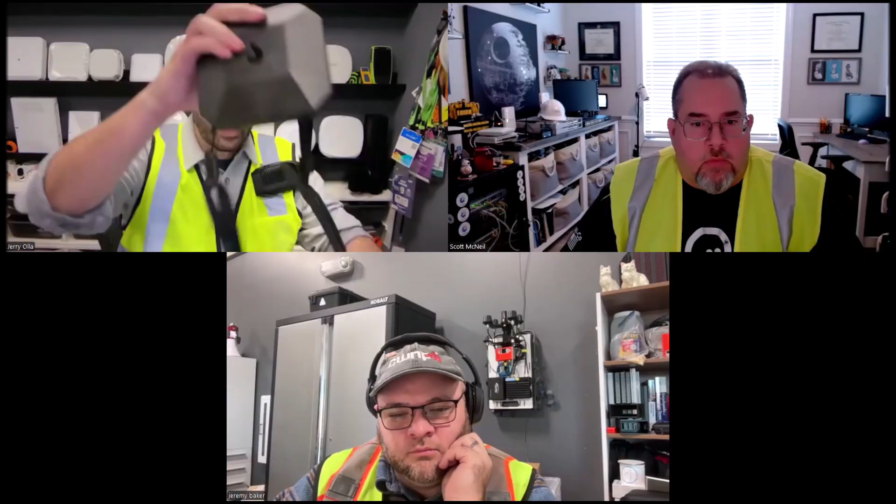So the Hamina Clip is similar to our current hardware, which is the Oscium Nomad. Both are very purpose-built site survey devices. The Oscium Nomad, if you're not familiar, is a 4 radio Wi-Fi measurement device, tri-band, all that good stuff. But this uses the traditional strap mechanism to carry. You've got a USB cable that goes from this into your device. So what we aim to do is create something that's a little simpler, potentially more budget friendly, and modernize it by leveraging modern technology like BLE to enable that communication.

So that's really where the clip was born out of. We've got this great device already, the Nomad, that's purpose built, but we wanted to make something a little more ruggedized, a little easier to use, and a little lower on the budget side to get into, lowering those barriers all over. Easier to operate, able to put this into anybody's hands, no cables, no straps. So it's all about simplifying and making this technology more approachable and accessible to a larger audience.

So this is to be used in conjunction with the Hamina survey software? Yes, with Hamina Onsite. And it just sends all of its data via that Bluetooth connection to your iPhone or iPad in order to populate your survey on your screen. Correct? Yeah.

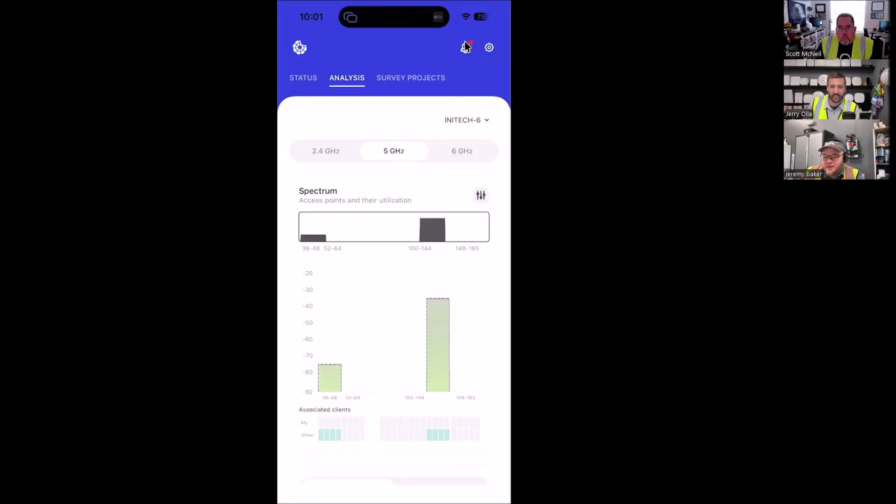So while typically you're going to be wearing this and having it very close to you, what kind of range are you looking at for connecting this device to an iPhone or iPad? Yeah, that's a good question. Honestly, we haven't done a ton of testing of how far away you can get it, because the focus has been around the operator, the device, and the iPhone or iPad being part of the same person. But talking with folks like Jeremy, the gears have already been turning for him to do some other things with it. So we're starting to look at what other things we can do with this.

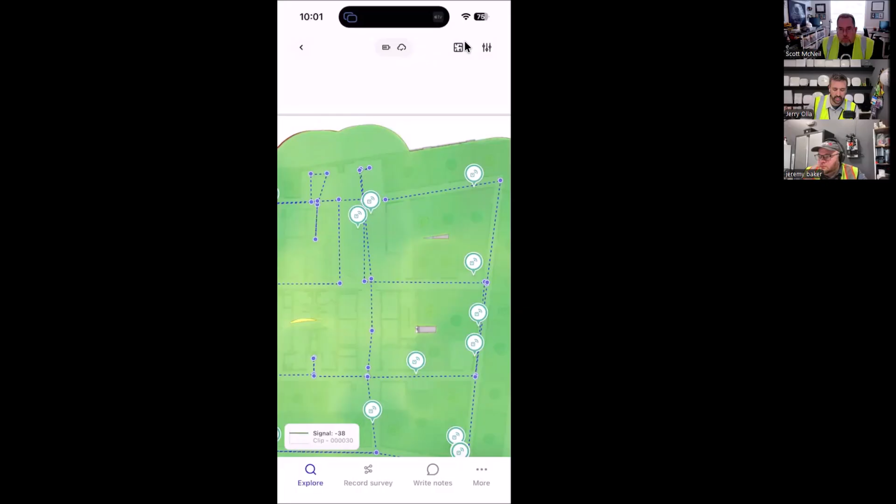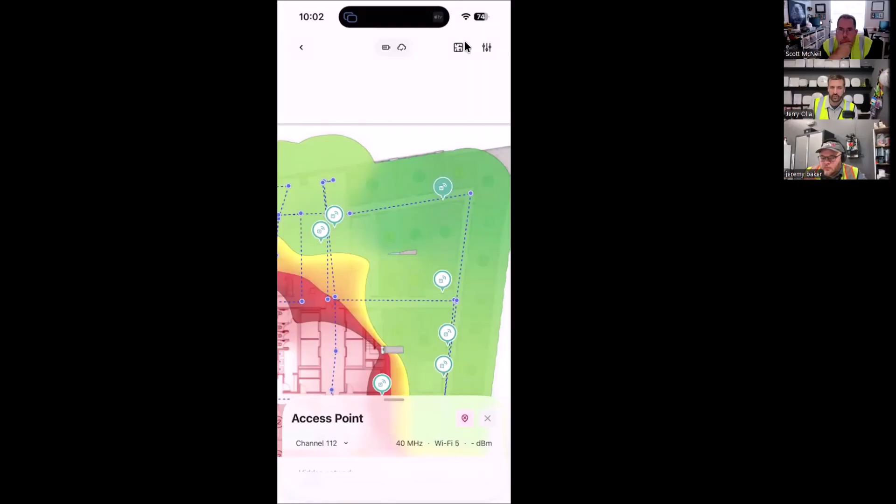But here's a survey that I completed recently. I had the clip to my belt and just walked the site, and you can see we're getting really nice detailed results of the signal. We could certainly get some distance, but the purpose of site surveys is generally that you're going to have the device physically on you and then walk with the device, if that makes sense.

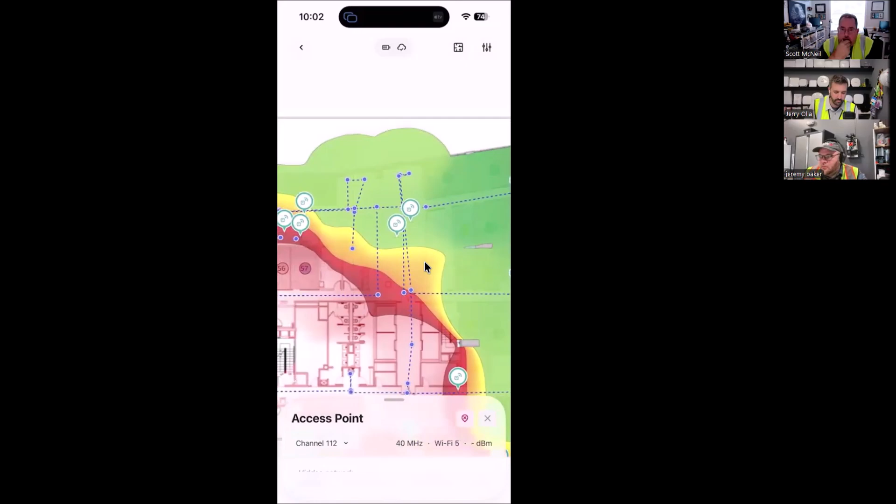Now, is this tap and turn, or is it more like an autopilot? Good question. That's actually something else that we announced. What I did here was all what we call continuous survey, and that requires me to physically tap the screen. For example, if I go back to a project, let's say I'm going to survey this room. I'm going to say record survey, then continuous survey. I'm also going to remove our filter here so we can see some live data coming in as we survey.

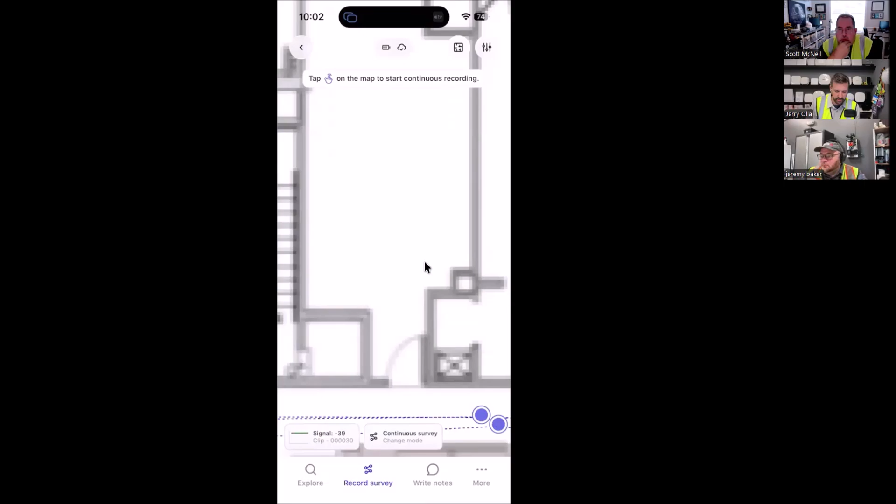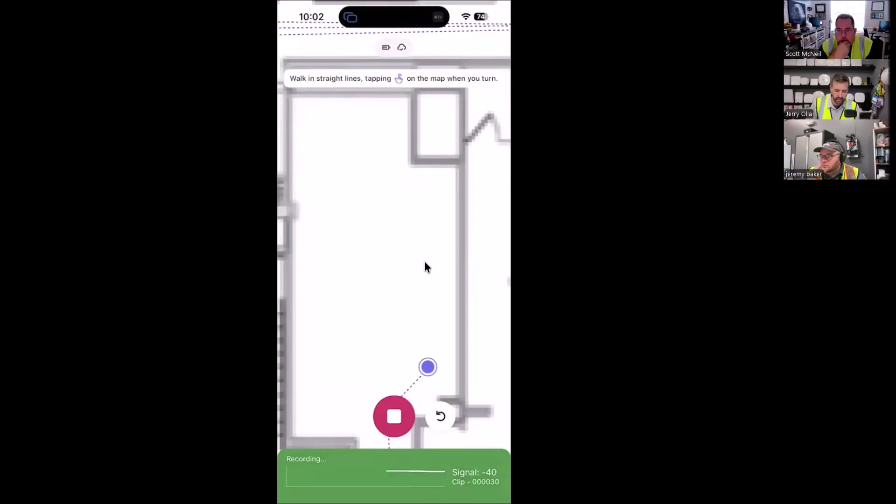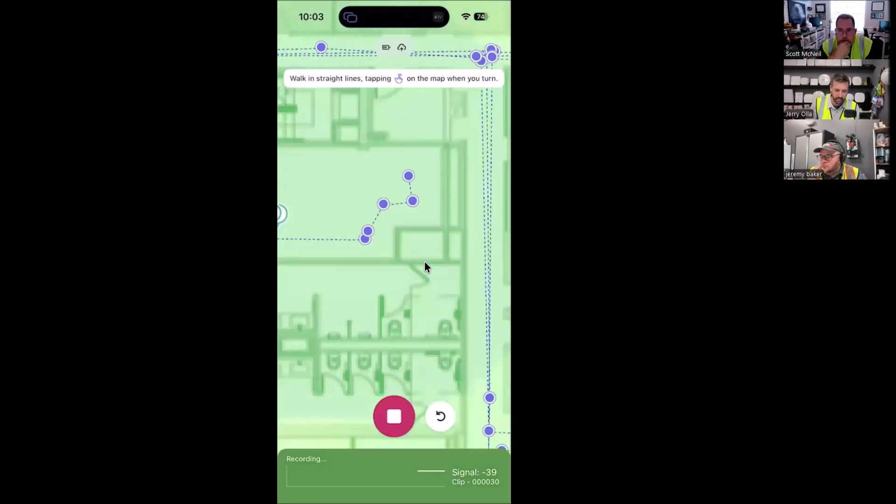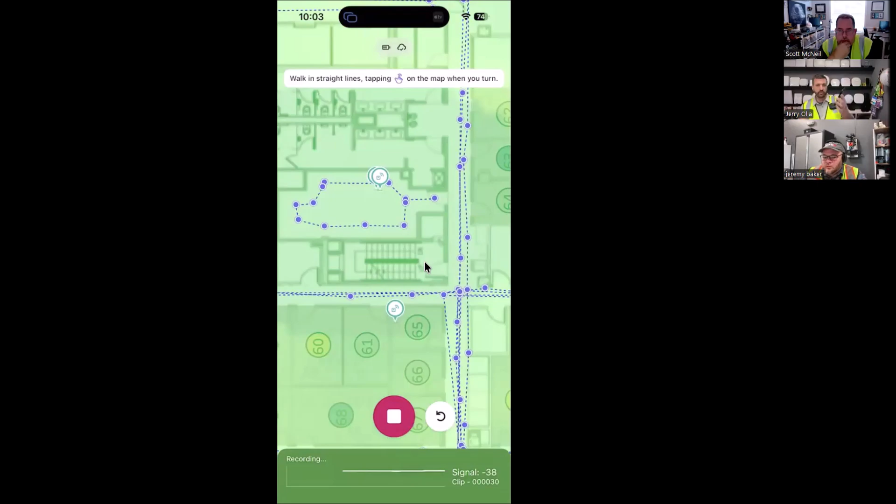So the process is I would tap, and now it's starting to record those measurements. As I continue to walk around, it provides that information in real time. If I set my filters to show the heat map, that heat map updates in real time while I collect the data. So this is me pretending to do a survey, but this is what the process looked like when I was actually at this office doing that site survey. I'm doing it wirelessly, no cables attached, so it's very convenient.

I think Chris Denham on our launch webinar made a really good analogy that I connected with about doing this without wires. You might think it's no big deal, I've been doing this forever with some type of wires. And I was the same way about headphones. I've used earbuds that were wired, and it's like, that works fine, it's not a big deal.

I just wrap up the cable and things like that. Yeah, occasionally it gets tangled up and everything. But then I tried the AirPods, and it changed my life in the sense that I could never go back to using earbuds with a wire after that, because it was such an eye-opening experience, right? And that's what Chris had said in the launch webinar that I really resonated with; he said it was the same kind of experience for him.

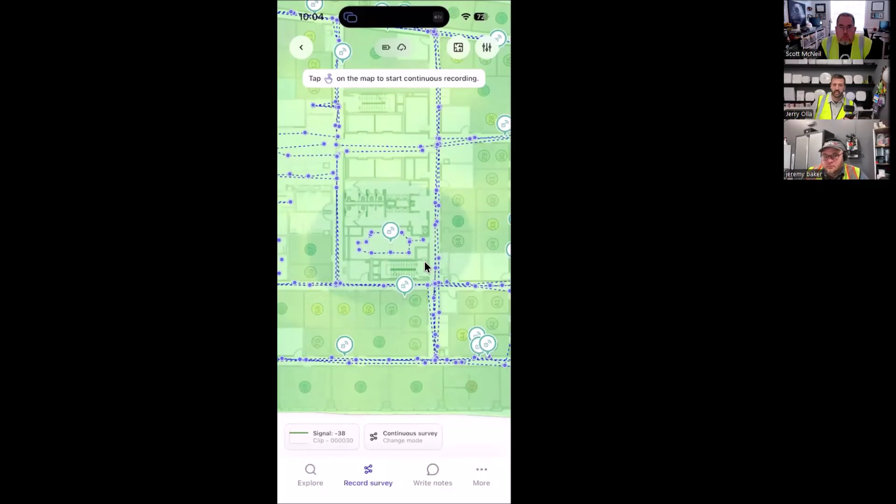Once you do a survey without needing to have any cables, without needing to worry about that cable getting snagged on a door handle or a desk, and not having to worry about plugging in or getting unplugged or disconnected, it's just such a different experience that it's hard to really capture in detail.

Well, Jerry, I'll tell you this. We're all wearing our high vis vests right now, and you get that or a harness on there, and there's buckles and all that stuff, and cables get caught all the time on it. So definitely for people that work in the environments we work in, that is a big deal, because nothing sucks worse than when you're walking around watching out for mobile equipment, and then your cable gets yanked out, and you've got to figure out somewhere to step to the side and get everything connected back up.

Well, and to take that a step further, just to compound on what Jeremy was saying, there are some areas where you're not allowed to have anything loose and dangling. True. That's just part of the safety retinue, that you can't have loose and overhanging things because there's a chance it could get caught in machinery. And so the last thing you want to do is get a cord for your $5,000 device tangled up in machinery. Not only are you out a $5,000 device, but now you've actually stopped production or caused damage to the site. And that's going to cost you a whole lot more than that $5,000.

I've never walked through a light curtain that I wasn't supposed to walk through, just to be clear. I'm sure none of us have ever done that. I've never accidentally bumped an e-stop, ever. I have gotten shocked on a coax antenna that was not supposed to have anything on it, but yeah. Jim Palmer's got some really good stories about power going over coax, that's for sure.

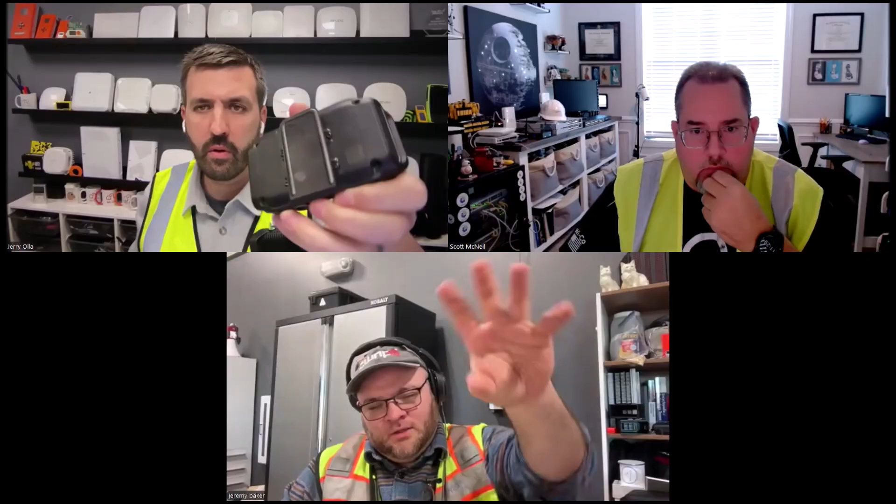Yeah. Oh, I don't think that clip could be completely reversed. The screw holes might, but I think there might be some difference in the plastic. Yeah, that's an interesting thought. You can see it's not completely centered there in the middle of it.

But with some of the prototypes that we have out there, we have had some folks doing stuff with 3D printing and coming up with MagSafe attachments, those kind of things. So we'll see where things go, but that is kind of intentional. We put the screws that are user accessible, at least in some manner, for those more creative users that want to do something different. I'm already thinking of ways to do that. I can only imagine the things you'll come up with.

So you can see we went with a very simple design, for the average user, just to make it simple of being able to flip it on. And it just looks cool too. It looks like some sort of sci-fi ship.

Right on. The other thing that's cool to be aware of, that at least some of your users might appreciate, one of the things that we specified with the size of this piece is it's compatible with a MOLLE system. So it will slide into a MOLLE backpack or whatever, and fit with your MOLLE straps. That's cool. I don't know if Jeremy's Proton Pack is MOLLE compatible. No.

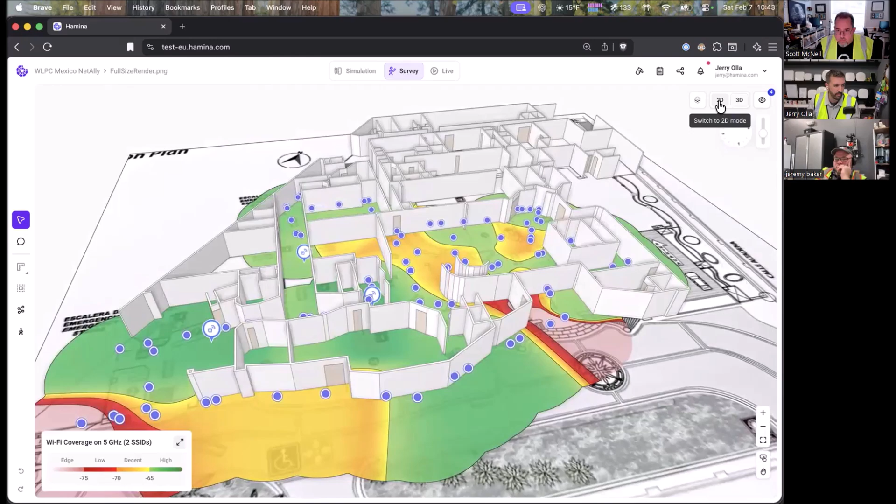But I think what's super cool about this is, one, it's automatically built this 3D model for me. Oh, wow. That's something that Hamina does just on its own, regardless of whether we're doing a simulation or pulling in data from Link Live or Mist or wherever. It'll automatically do all this for you. But my favorite part is, if we go now from survey to simulation, or what I like to call the sandbox, it's going to automatically take all of the survey data that I collected using my NetAlly device and apply that to the simulation.

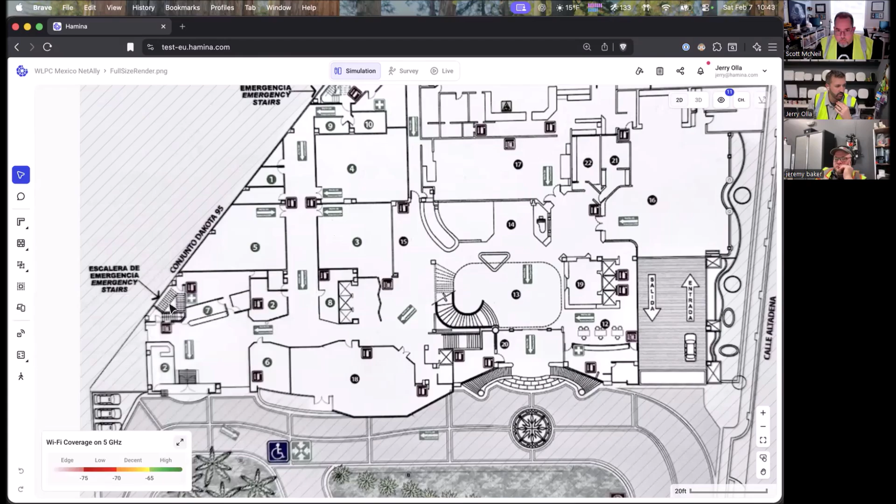What I mean by that is, if I say, okay, use the simulation prediction mode using the survey data, the learned environment from the survey, without me having to draw any walls or specify where's the glass, where's the drywall, where's the concrete, notice how it already understands how that signal is going to propagate through this space, because it's learned the environment from the survey data. That's super powerful. So you're saying it's kind of taken into account, hey, I know there's a wall here. It preloads attenuation measurements. Yep.

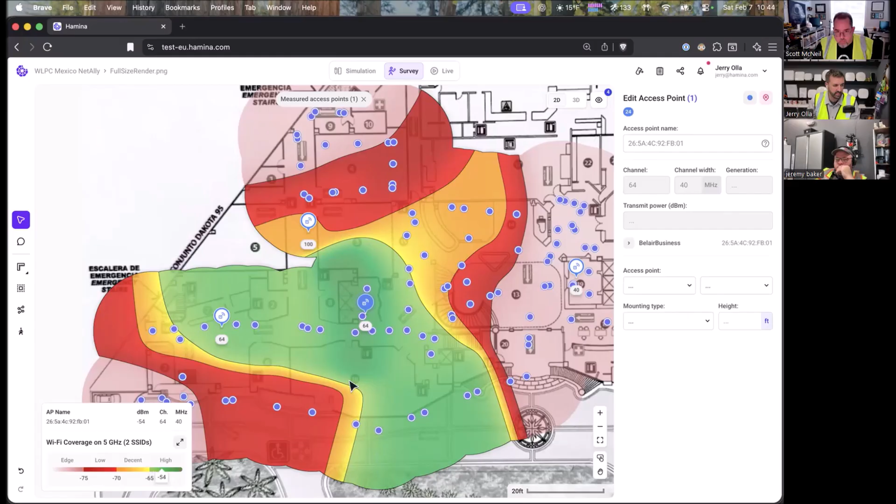So it's taking all that data it learned, showing the source of this signal was here, here's how it propagated out from that source, and then it learned how that signal is attenuating through this space. So now when I go back to my simulation side, as I move this access point around, inside a room or out in a hallway, it understands how that signal is going to propagate through that space. So yeah, that's just one of the useful things. Cool.

Obviously, then we can do all the other things you would do with a normal survey as well, whether you survey with the Nomad or Clip or an AirCheck G3 in this case, we can create reports and everything based on that. We can analyze all the data from the survey. Even our new network status works with this as well. This will allow you to validate a network based on multiple criteria and metrics to show you where you have any gaps. In this orange area here, it's telling me I'm failing on 3 different criteria: primary coverage, secondary coverage, as well as some interference in that area.

So we don't have enough signal, and we have too much signal on the same channel in the same area. So weak signal, but too much on the same channels. What was that again? Will you show that menu item again? Oh, the heat map. This is the new network status heat map, the one we just added recently. I think it was either right at the end of last year or start of this year. But yeah, just in the last couple of months, we added this network status visualization.

And is that heat map customizable, like you can kind of set your levels? Yeah, so you can turn on and off what criteria you want it to validate against to give you kind of that pass/fail. But then also it's tying into, okay, what is your coverage requirement? And you can adjust that requirement here. What's your secondary coverage requirement? Okay, so it pulls from what you have in those. Yep, it pulls it from there. Yeah, exactly.

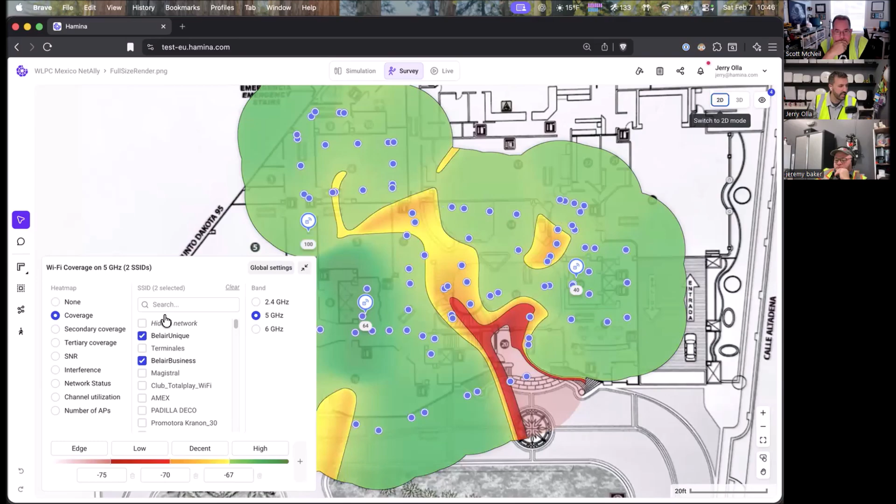So you can see here it's showing me what's set, but if I go into here and say, oh, we don't actually need -65, we only need -67. Now, if I go back to my network status, it's going to have updated that to -67 for our primary requirement. So that's kind of like the Airwise part in the AirMagnet reports.

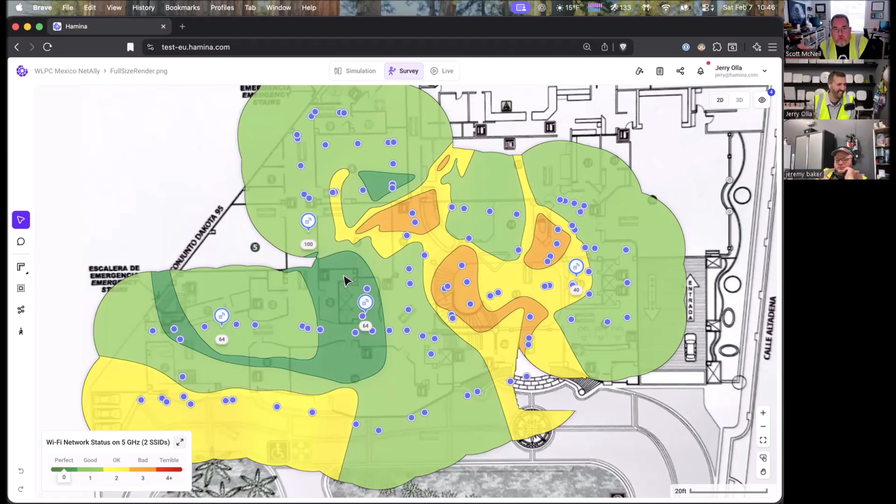Yeah, I remember that. I'm an old AirMagnet guy too. It's been a while, but same here. Since I've moved over to Hamina, I have not been using AirMagnet. But that was another bonus with using the NetAlly for the survey stuff, you could export that to AirMagnet as well. Yes, it's a good point. We don't have any ability to work with AirMagnet, but I don't think we've got too many inquiries of that these days either. No, I wasn't saying that. I'm just saying that I do remember the ability to export my data from my CyberScope using the AirMapper utility. It just keeps becoming more and more versatile, which to me just increases the value of both.

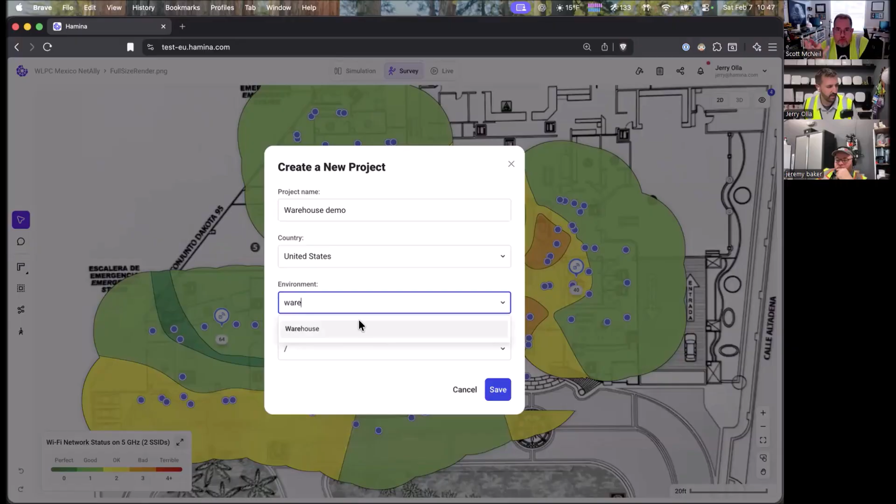And is that network status an element that can be added into the reports as well? Yeah, that's a good question. I can't remember off the top of my head if we've added that to the reporting yet. If not, it will be very soon. But yes, that will be part of the reporting side as well if it's not there already.

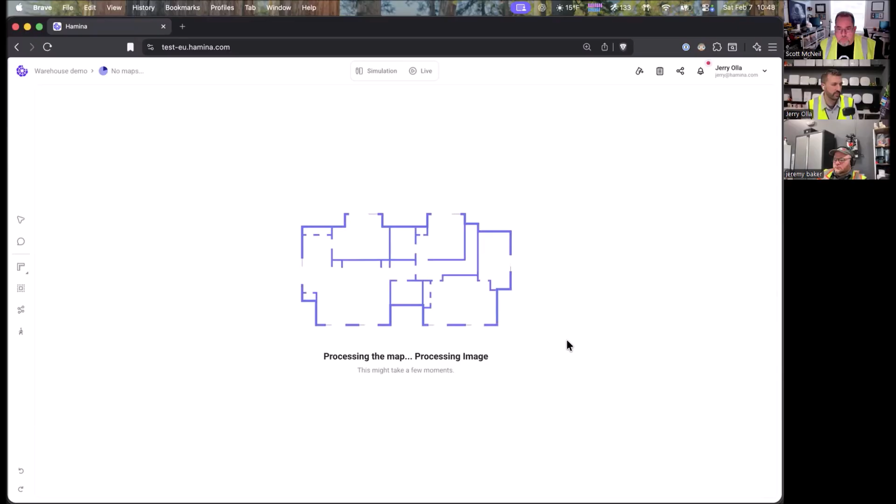I was going to show you one more demo here. We were talking about this a little bit before the show started, like pre-gaming, with the warehouse side of things, and reflections and stuff, right? That's a common thing in any environment where you have lots of metal and materials and lots of flat, long surfaces, depending on what kind of objects are in there. One of the things that Hamina can help with is the ability to automate a lot of that.

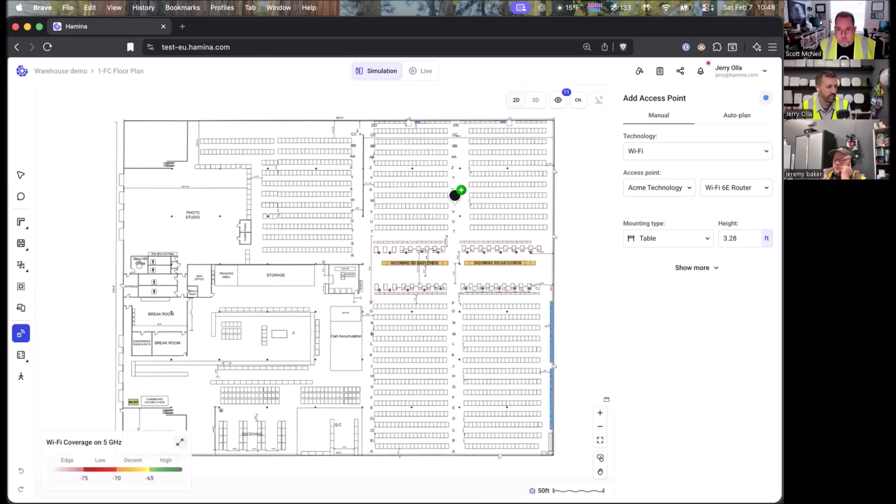So in this case, I specified a new project and I said this is a warehouse. And I just dragged and dropped a floor plan into here. This floor plan is nothing fancy in the sense of any kind of layers. But the intelligence that I've given it so far is just that this is a warehouse. And even with that limited amount of information, it can start to build a 3D model of this space. So let's see how long it takes. It's still going through. There we go.

It just detected all the walls, and then that quickly it detected all the racking and shelving. Wow. So when it does that, does it go ahead and set attenuation values to the racking and shelving? Yeah, it's going to make some default assumptions, because we told it it's a warehouse, so it's already got some intelligence there. I like to say every warehouse is a snowflake, they're all unique in their own ways, but we can make some default assumptions that at least get us in the ballpark.

We're going to guess those are shelves, warehouse shelves, and in this case it gets 26 feet and 8 dB per meter, which means we've got some fully stocked shelves with some pretty dense materials. So what that all translates to is if I drop an access point on here, you can see that's really going to attenuate a lot of that signal.

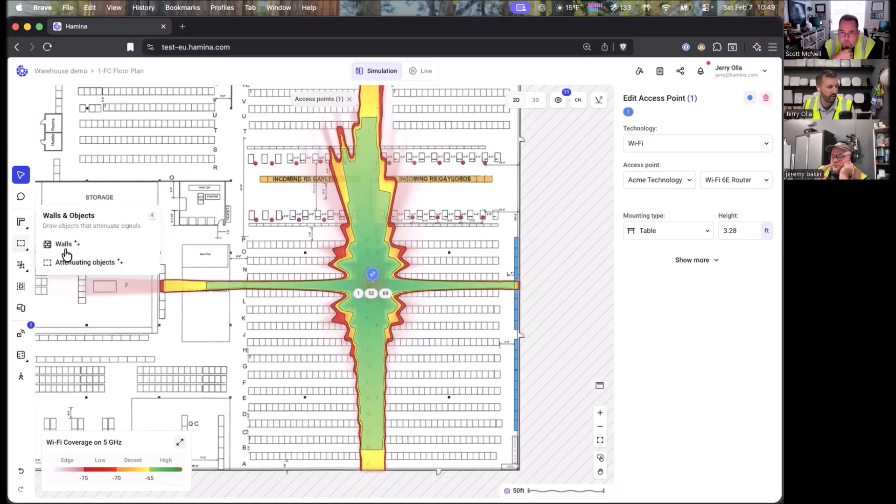Now, that saves so much time from having to manually draw everything out. Yep. And that's really the goal, right? It isn't so much to get the attenuation exactly right, but to save the time of having to manually and tediously add all that information into here. So what I can do now is I could either say, okay, let's apply the default because maybe that's what the bulk of this is. And then from there, I can go and tune all this.

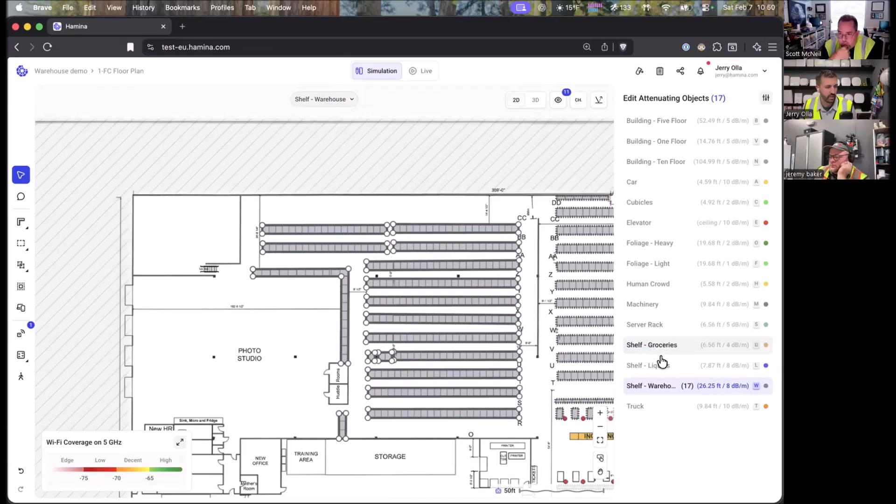So let's say these shelves over here are not full height shelves. These are actually some shorter shelves here. So all I'm going to do now is select all of these, and I'm going to say, instead of those being shelf warehouse, we're going to make those be something else. We're going to say those are shelf liquids, and that's just one of the other default ones. And now we've got some shorter shelves. So that quickly we can tune some of the stuff and make this more accurate.

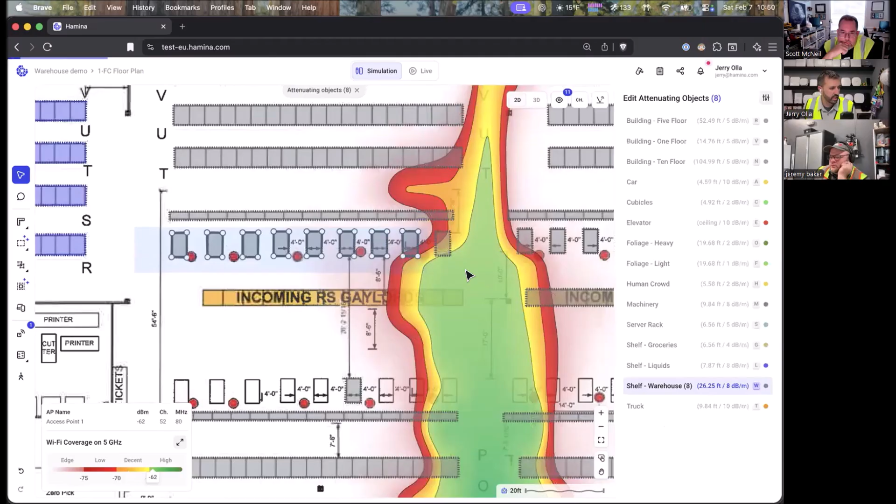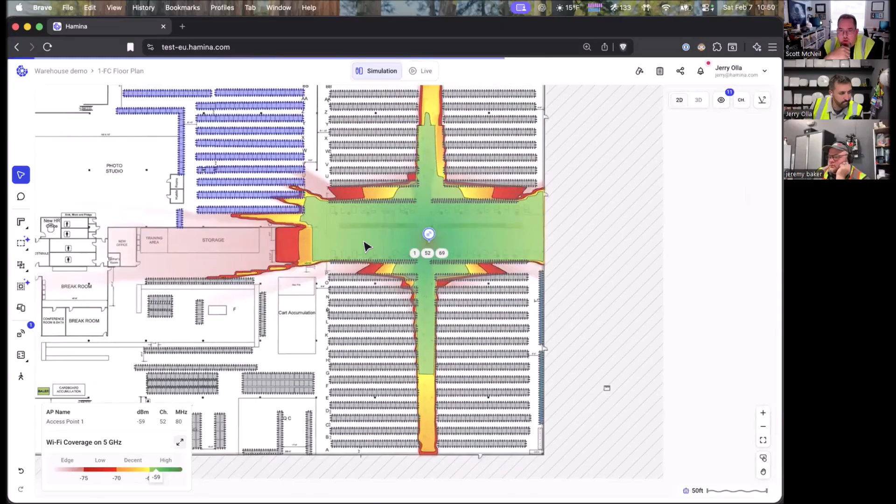I also noticed it drew in some shelves for some areas that are actually desks. These aren't actually shelves. So I'm just going to clean those up and delete them. And I would much rather have it do that, if it thinks that's a shelf, because it's super easy to go in bulk and delete stuff that it added that shouldn't be there, than have to go and manually add it because it missed something. I tell our interns and our new junior engineers, it's so much easier to modify than build from scratch. Exactly. Yep.

Spot on. Yeah, so you can see here, if we just take this one access point, let's put this thing higher up in the air. What's a good model AP that you guys are usually working with in this kind of environment? Would it be like a Cisco or? I've started using a lot more Fortinet gear personally. Okay. Yeah, let's just grab something. Jeremy does a lot of Siemens and whatnot. Any particular model we should use? In the warehouse, a lot of times that would be 430.

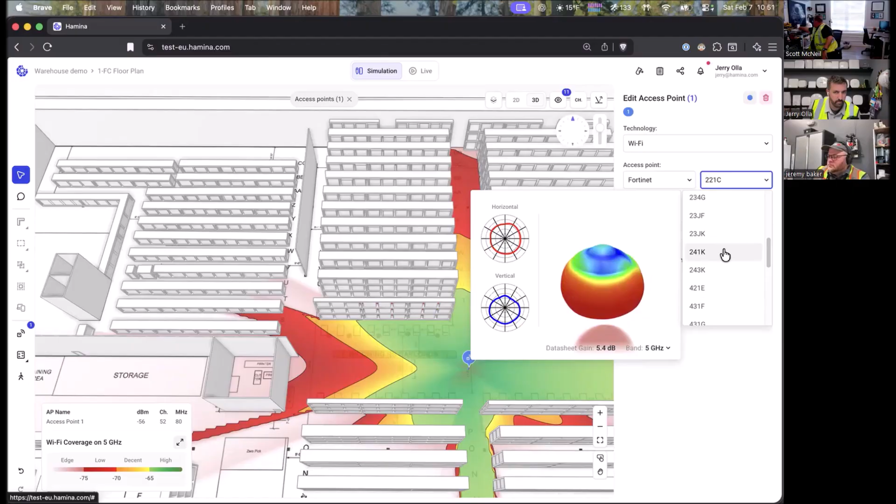Hang on. Which one were you using, Jeremy? Are you using Fortinet in warehouses, or what are you primarily using? A lot of times 241K. There'll be like Aruba or Cisco or Mist or sometimes Ubiquiti. Yeah, there it is. Okay. Let's put this thing up on the ceiling.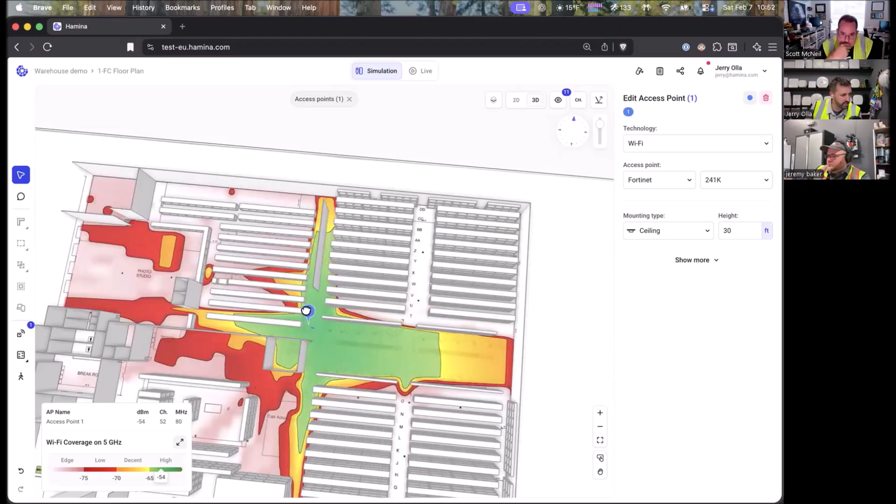So check this out. If I put this up in the air, we can now see that represented, and we can understand how that signal is going to propagate. But let's do something like this, where we're near some walls. So we've got a few different kinds of walls and objects in here for the signal to bounce off of. And here we're going to add in FRT, that's fast ray tracing. That's going to give us a more accurate representation of any kind of bounces that might happen with that signal.

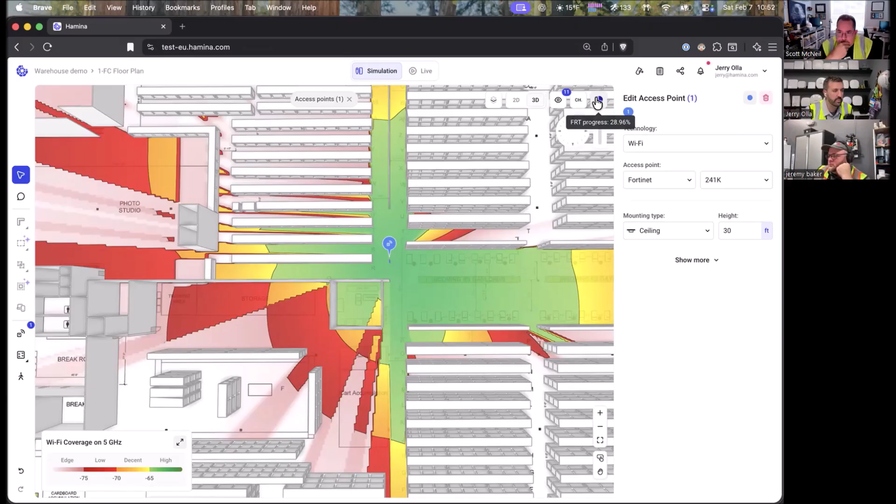So it's going to compute FRT here, and the first time we run this, it'll take a little while to add that all up, but it's basically looking for any paths that the signal could take that might have some reflections and bounce off of to fill some of that. And what we should also do is probably look at this in 2D, so that way we can see this a little bit easier. But yeah, it's still going through and computing that. So the first time it computes that FRT, it can take some time.

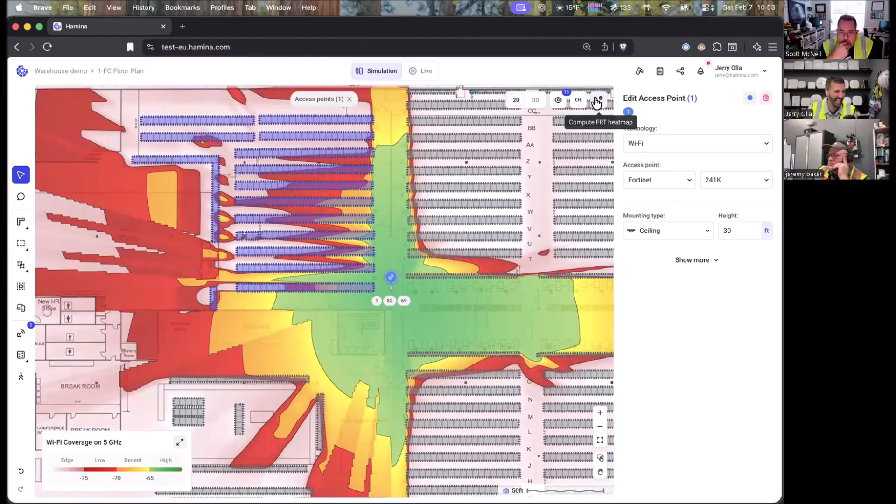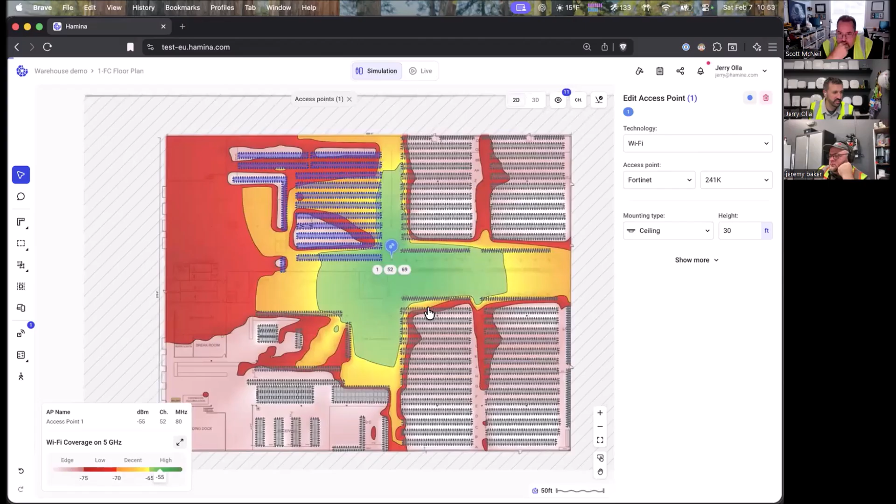Well, it's some serious number crunching when it's taking that long on your beefy cloud servers. That's right. But there you go. You can see how much that can impact the reflectivity through the environment there. So you can see now, with the reflections in this, we definitely see that signal spread through. Also notice how, especially off of this wall here, you're seeing that signal kind of bouncing down some of these aisles, especially on these shorter shelves. But we're not seeing as much into these taller shelves that are still blocking a lot of that signal.

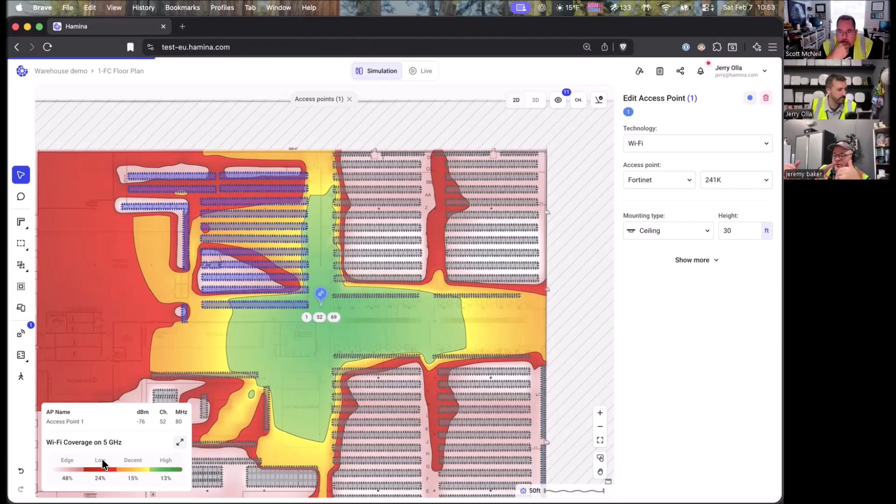Well, and as we all know, some reflection is good and can be really good, but too much reflection ends up becoming very, very bad. Yes, especially in this environment, that's where you're dealing with those co-channel interference issues. You'll see a lot of that represented in the reflections. So Jerry, I've used that fast ray tracing when we were doing some predictive coverage for outside-of-the-building tractor trailer loading, to get a better guess of how well the reflectivity will help us going into that trailer.

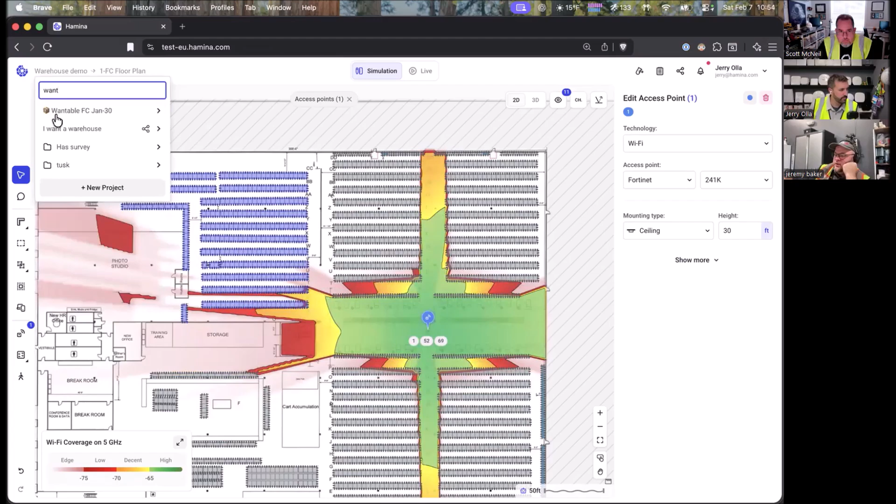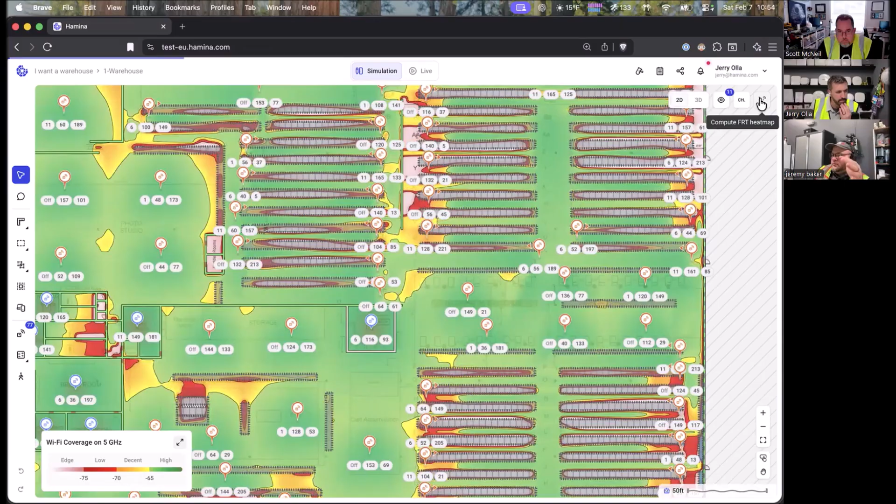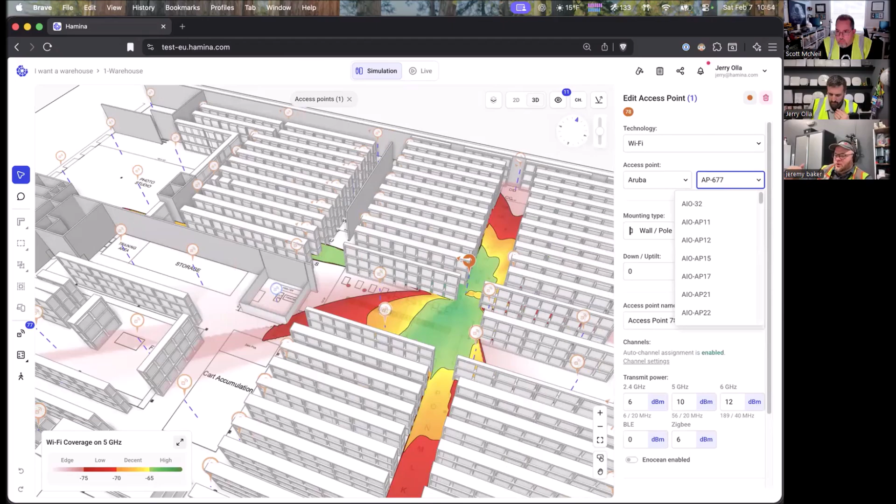Yeah, that's a great feature. What would be really nice with that 3D antenna model for planning is if you could toggle it on where it would stay up on that side menu. Which display? So when you click on an AP, you've got that little rotating 3D antenna pattern off to the side, below show more or something like that. That'd be kind of nice to have, because sometimes when you're going through with a customer, it helps visualize. And we should probably show what we were talking about before the show, adjusting that antenna.

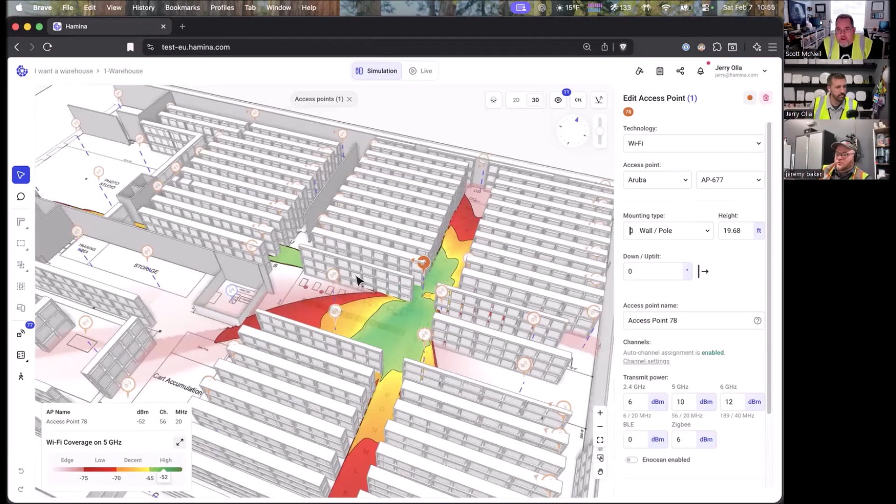Having that where it could be pinned up easily or persistent, because when you're talking through with customers, it is really nice to be able to say, hey, this is what the antenna pattern looks like, and here's how that manifests. Being able to pin that little rotating image up and keep it there while you're working on other things would be helpful. This has saved me so much time with customers instead of showing some innocuous antenna pattern chart. Sometimes it's the little things. For sure. It's hard to explain it to people sometimes.

And actually, that's a good point. With some of the vendors, they've given us permission to share the OBJ files, where you can actually download them and print them. Not all the vendors, but we've gotten permission for some. So it kind of depends on the vendor. If you see the little download option, you can actually download the OBJ. So to that point, if you're trying to articulate something to the customer, you can 3D print that antenna pattern and actually show them. Oh, that's interesting.

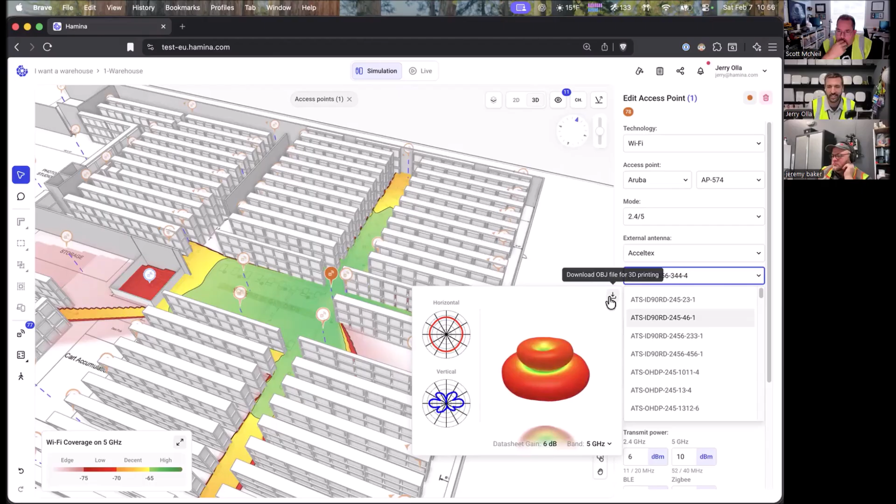I think all the external antennas, like Acceltex for example, allow us to download those. So let's grab an Aruba with an external antenna, and if we do any of the Acceltex ones, you see the little download thing, so you could actually 3D print those antennas to have a physical reference of that antenna pattern. That's cool. Fun little things.

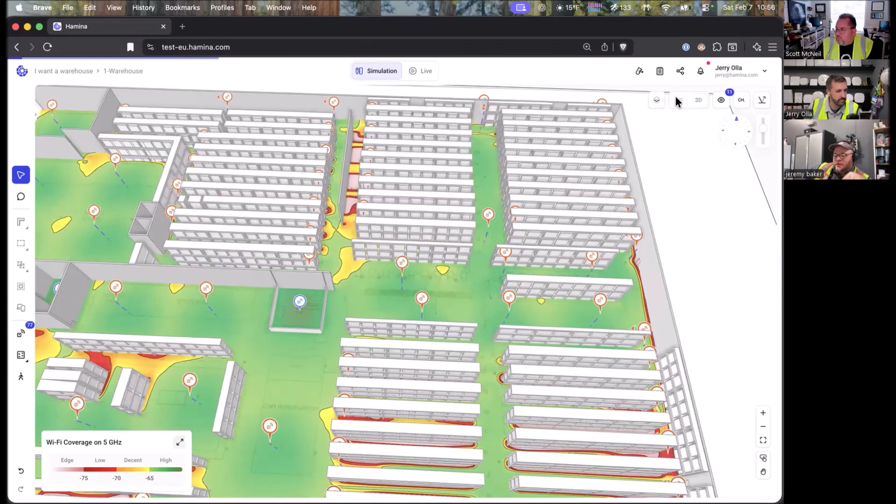And then Jerry, while you've got this here, maybe we should talk about different ways, because we have clients at different heights. Sometimes we've got an access point at 30 feet up, and you might have an overhead crane that operates on that wireless, but you also need coverage at the floor level. So using that client height to visualize how that changes. Absolutely. Let's do this.

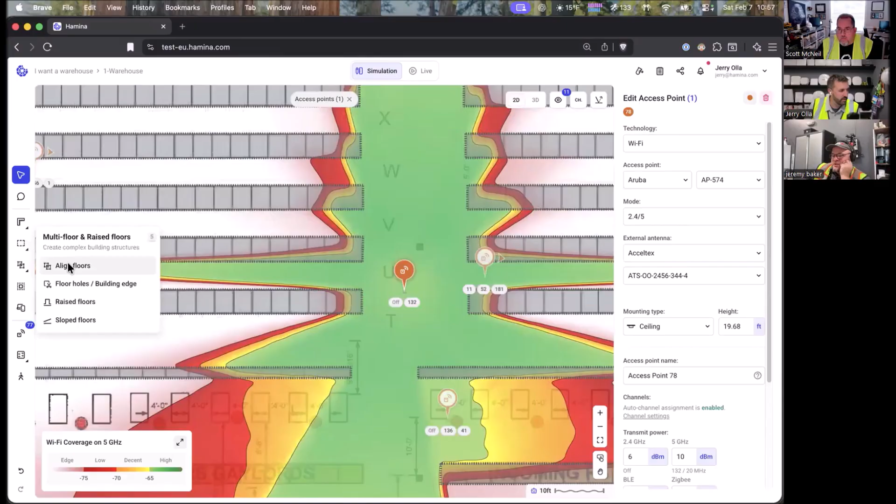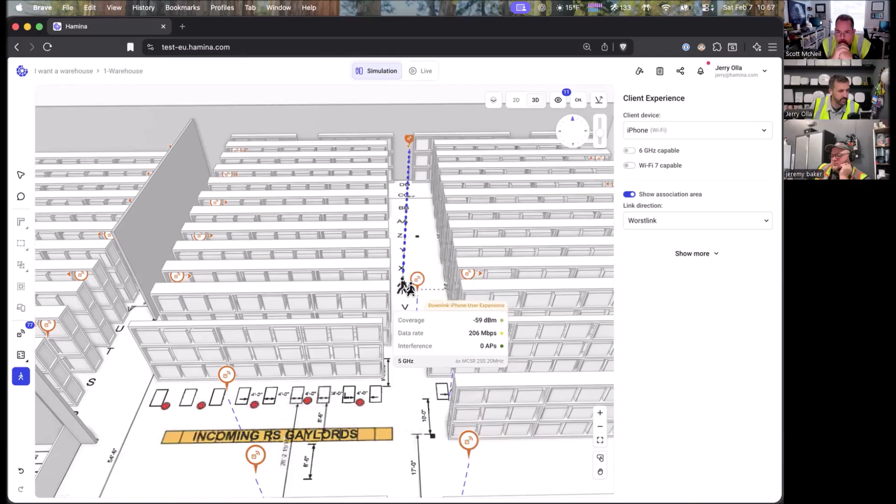I'm going to set the ceiling height to something pretty high up, say this really tall building here. But maybe our APs are lowered down, and we want to see what the signal looks like up higher above these APs as well. So we can simulate a client. We could do two different things to represent that. We could simulate a particular client in the environment and specify the height of that client by adjusting this, and you can see the guy moves up and down vertically depending on what height I have him set to.

So it'll show you that connection. So if we move him all the way up to like the top of the racks here, for example, you can see now he's up above the racks here. So you can see what that signal looks like there.

But also again, like Jeremy said when we were pre-gaming, the problem with that is, when you have him up that high, he's not wearing his fall arrest system. We need to work on that. We need to add a PPE or something like that harness option. Yeah, it should auto put PPE on them.

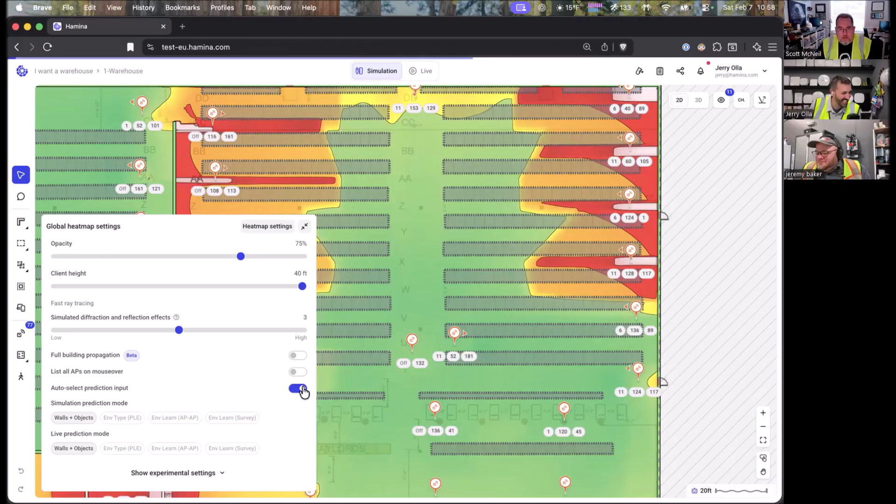Okay, so let me show you this here. If we go to this in our 3D view, we can also adjust that same client height, so we can actually show what that signal level is for the entire network. And you'll see it'll update that automatically as we go through these levels here. You see the heat map dynamically updating.

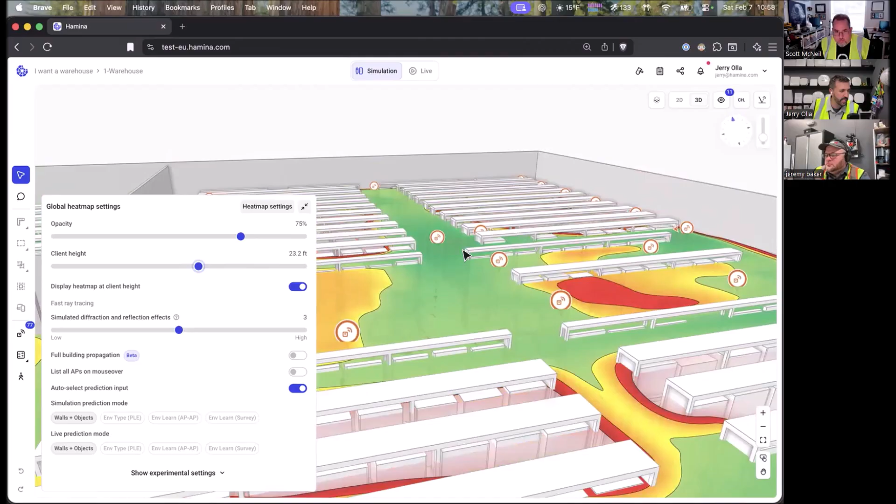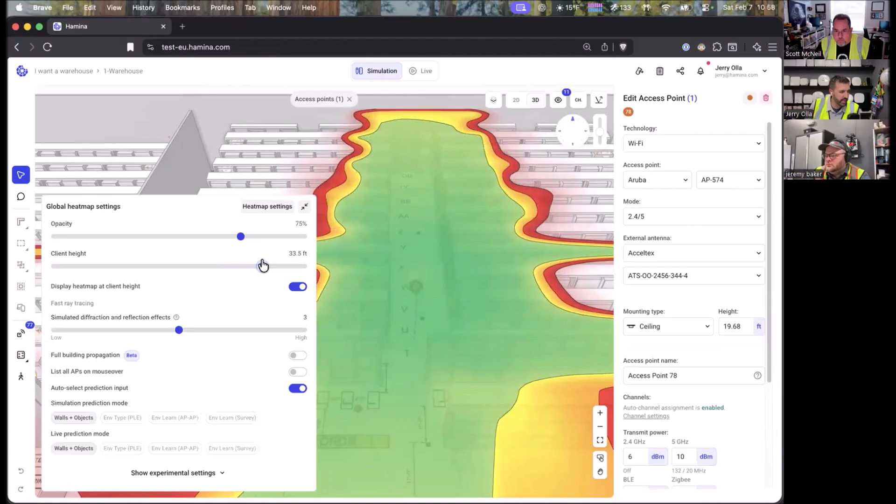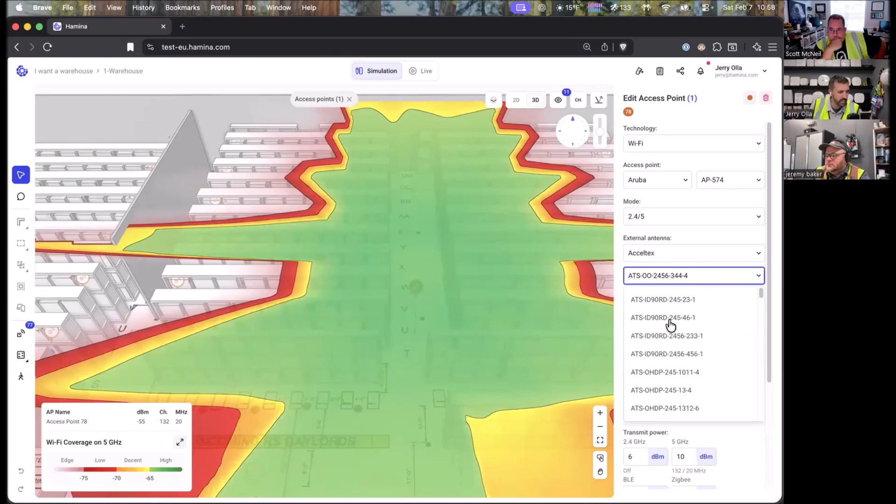But also, what if I just want to see a particular AP and what that AP looks like? So we could just select a single AP as well. And this is actually another good way to show that signal propagation, right? So if we look at this from way up high above that AP, here's this particular AP with this particular antenna that we're using. And we can see that signal propagation. So you can see it does have quite a bit of propagation that goes in all directions, very omni here.

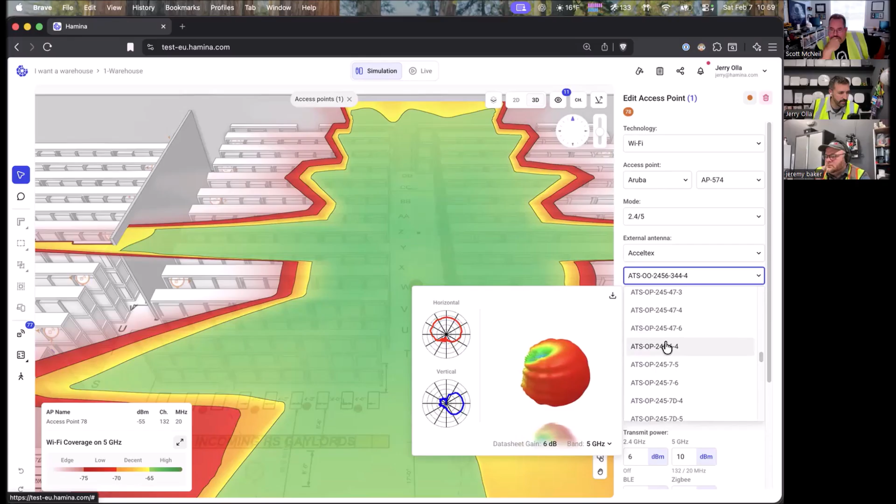But if we did something that was more directional, let's take something with some directionality to it. Let's take maybe this guy, for example. And now we're going to point this from the ceiling down at the floor. And now you can see the impact that would have, right? So the AP is still here, but we're looking at what the signal looks like up above that access point. So you can see how it's really starting to lose that signal directly above that AP pretty quickly.

Versus if we start to slide that down, you can see how that signal improves. Once we get back down below underneath that AP, we'll let that update there. But yeah, now we're into the aisles. So if we go just up a little bit and get just above them, let's go to something like here. Now we can start to see how that signal is going to propagate above the racking there as well.

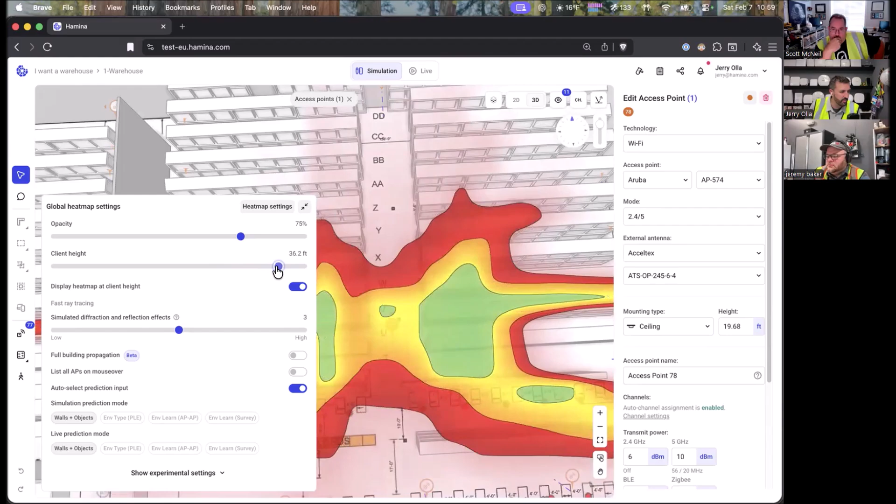So yeah, I like to think of it as kind of like the water level on a fish bowl or an aquarium or something. You can adjust the water level there and see the top of the water.

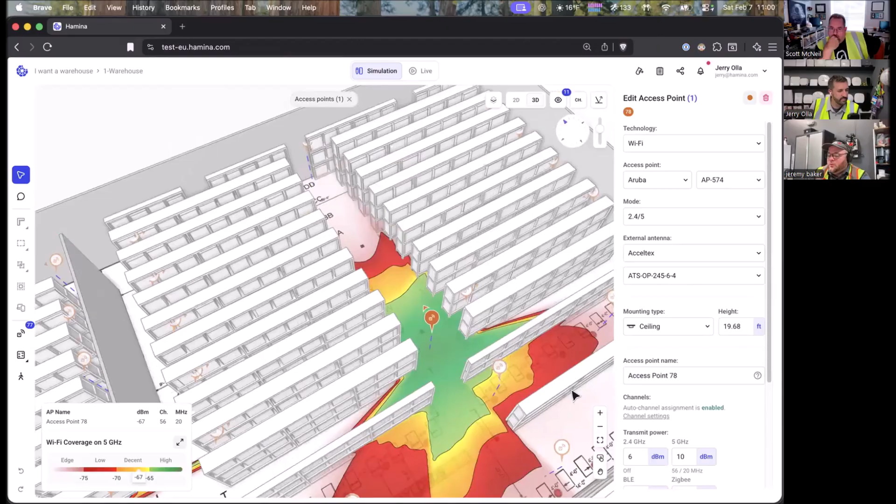Well, that's a really good tool. What's really nice about this is, if you explain it verbally to somebody, it's kind of like math, where if you have an ordered pair or an input-output of a function, those could represent the same thing as a pictorial graph.

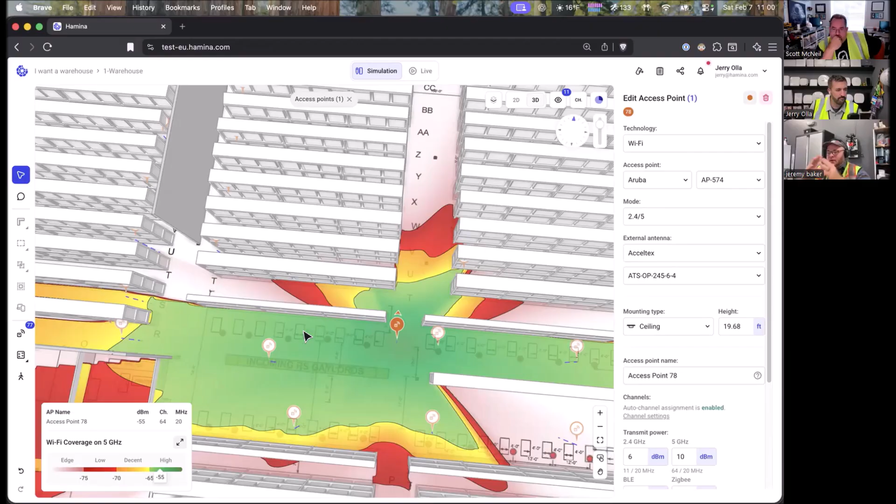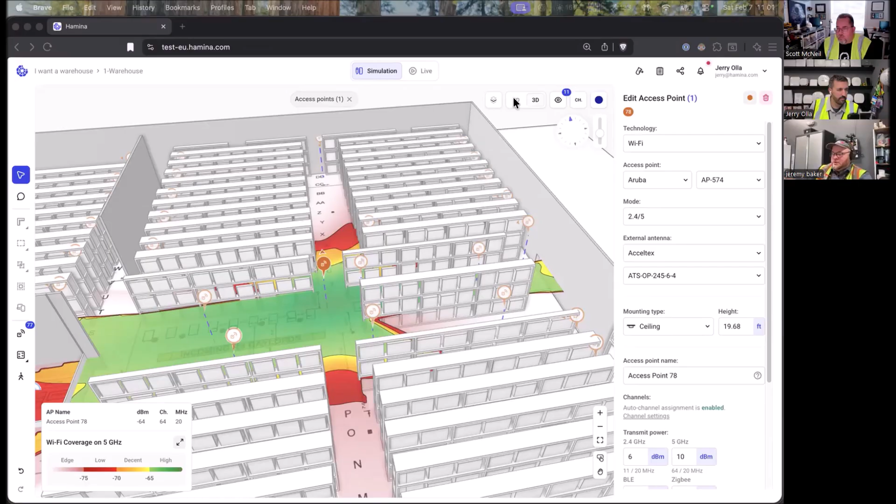And so with something like this, you say, hey, the interference doesn't look bad necessarily down here between these racks where the signal's getting eaten up. But if your access point's above those racks and you've got an antenna that spreads in an omni, then all the other APs in that range can hear it. So stuff like this is really good to help do that storytelling for people that maybe hadn't done 100 site deployments and understood the real life implications of that.

Yep. And you showing me this is something that I hadn't thought about using this for. So this was awesome for me to add to my toolbox today.

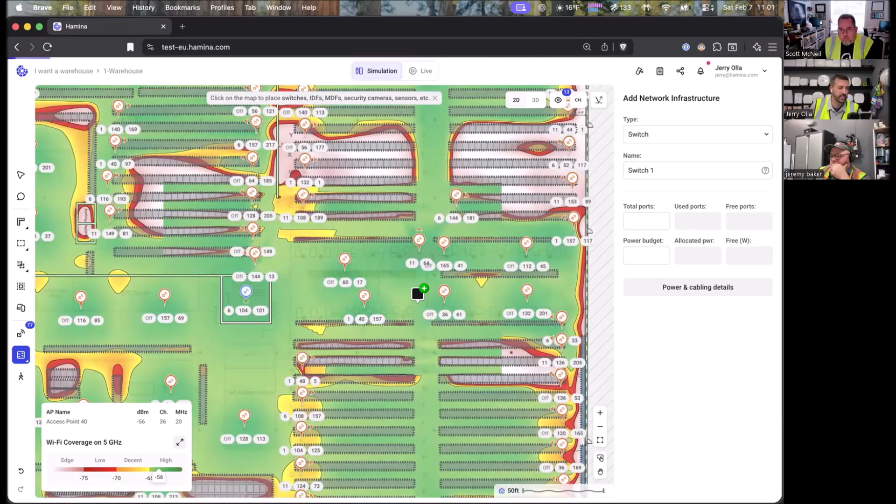Cool. Well, let me show you guys one more thing; you guys tell me if this is something you would appreciate, or maybe some of your audience members would. In these industrial environments, one of the challenges that I always ran into doing designs is, where can we actually get a cable, right? Especially if we're trying to wire this stuff up, and how far away are some of these things. So one of the things that Hamina can also help with on the network planning side is being able to do that wired planning.

And just by placing something like, I'm going to actually specify there's an IDF I know in this warehouse here. And let's just see if we have any issues with some of these cable runs with that. That's our only spot for like an IDF, right? And you can see we're gonna have lots of cable runs that are all going to be over that 100-meter distance, if that's our only location for that IDF. Now, thankfully, they do also have an IDF.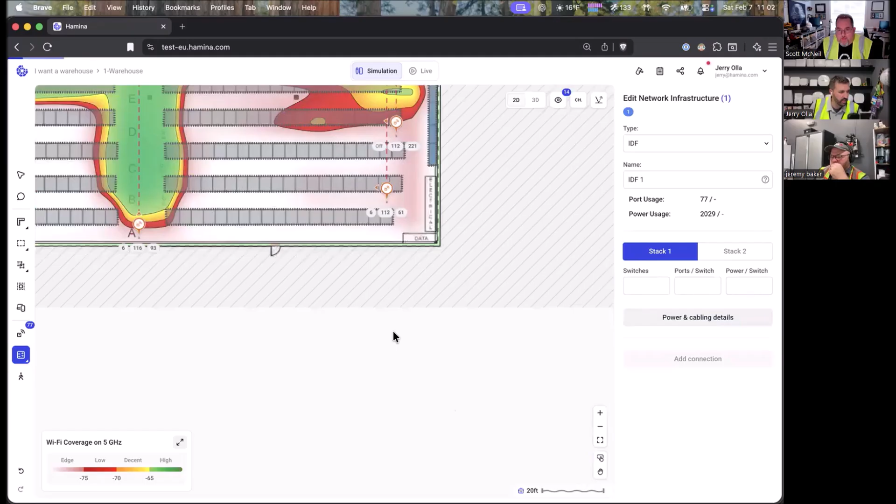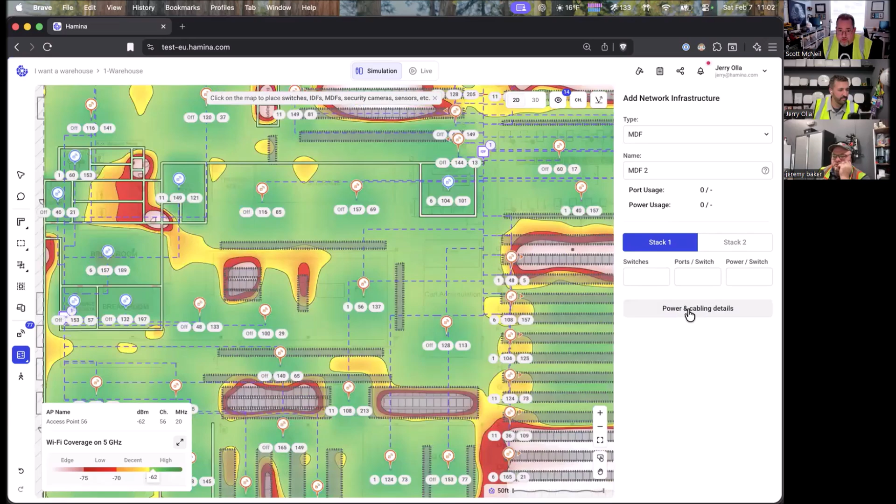So here. I'm going to go ahead and stop you right there. My last project, I really started getting in and using these features, and it's really starting to turn Hamina into an overall network designer too. And I'm really hoping you guys push forward and get more in depth and start tweaking these more, because these tools, even for basic connectivity, are pretty awesome.

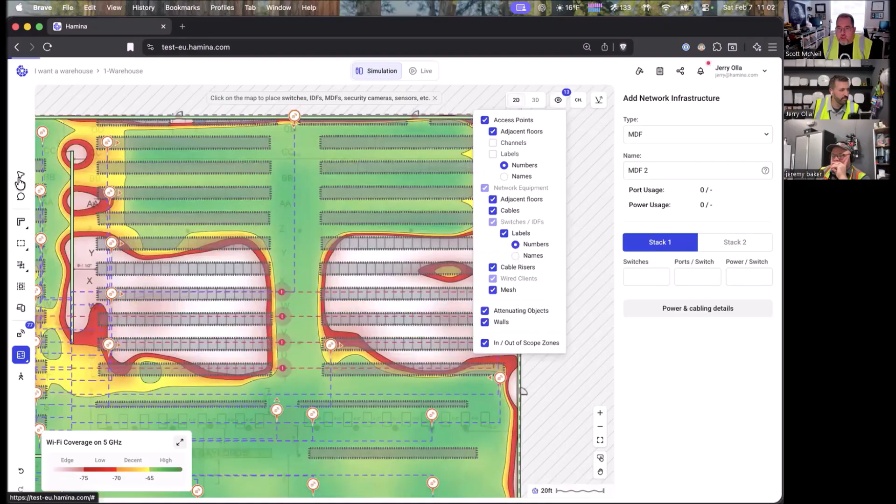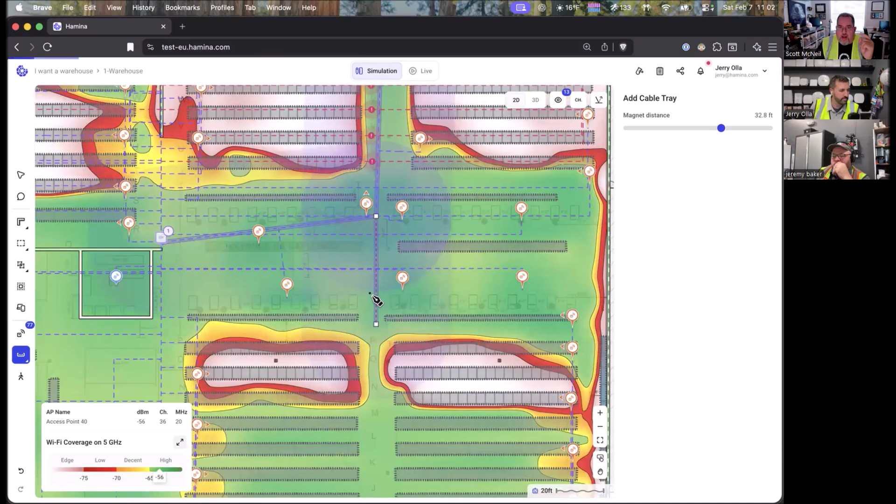And I know I actually put in a feature request for your cable tray planning, to be able to specify the heights of those cable trays. Yes, because that is very necessary in these environments, because your cable trays are not at your standard 15 feet, right? A lot of these cable trays are 20, 30, 40 feet in the air, depending on the size of the building that you're in. They could be snaking one of 100 different ways. And so that makes this planning all the more important.

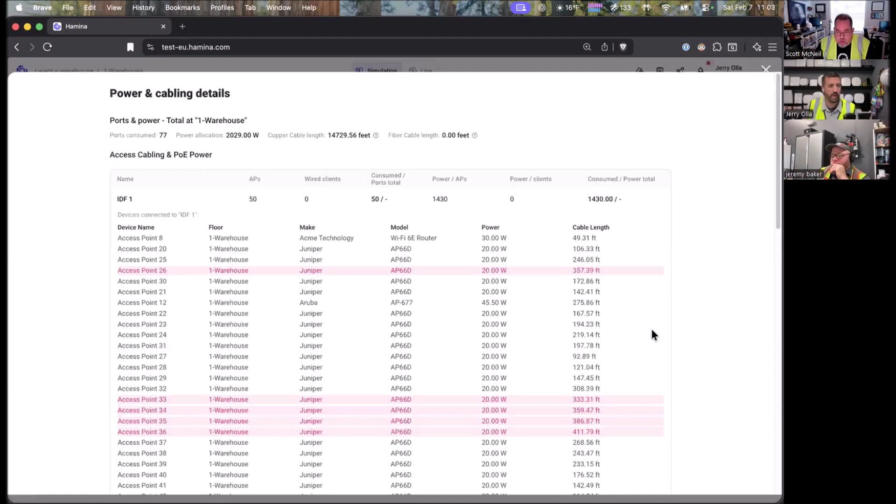And I really leaned on it for a recent project on placement due to location of IDFs. Nice. And that tool is very, very strong. And I really hope you guys continue to develop and improve that tool. Yeah, that's great feedback. Yes, there have been some requests for that.

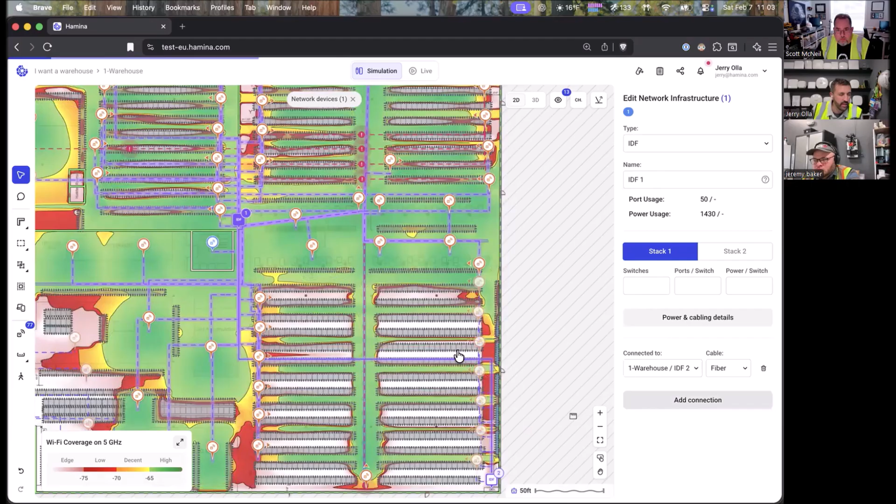What we added most recently is the ability to add cross connects to the actual switches or IDFs, being able to specify what type of cable. So that's going to add that additional kind of cabling component. So yes, we are continuing to expand the wired planning capabilities for sure. That's a big emphasis for us.

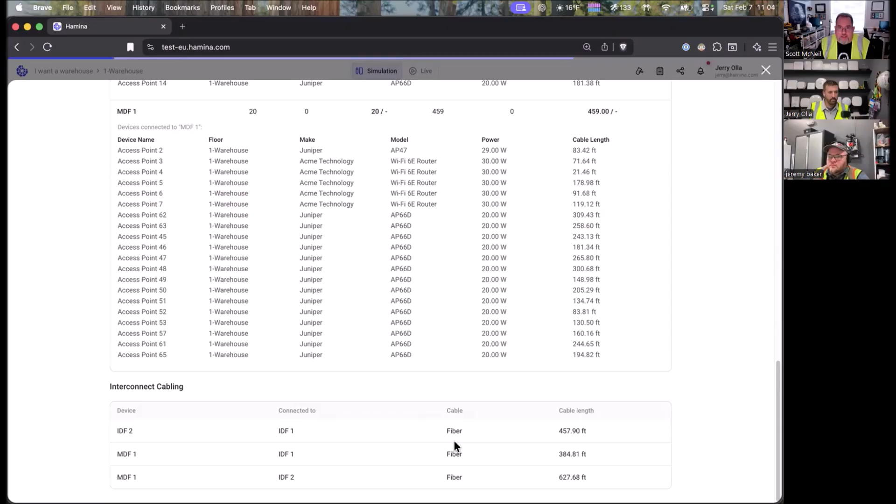Well, the nice part of this too is when you do the reporting, you don't have to do PDF reporting. You can do link reporting, which my clients so far have absolutely loved, being able to click that link and go and manipulate all of these things on their own in their own time. They can't change anything, but it lets them look at all these different facets. It lets them do the 2D view, the 3D view. It lets them cycle through whatever you decide to let them cycle through in the report.

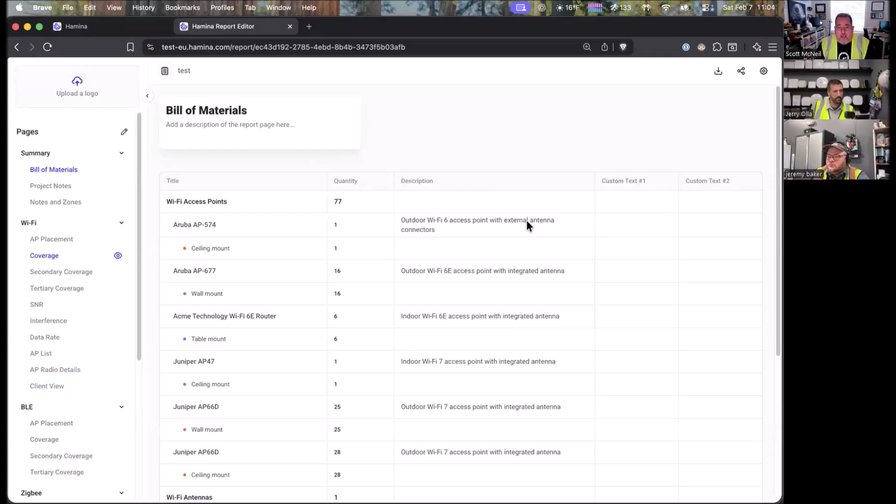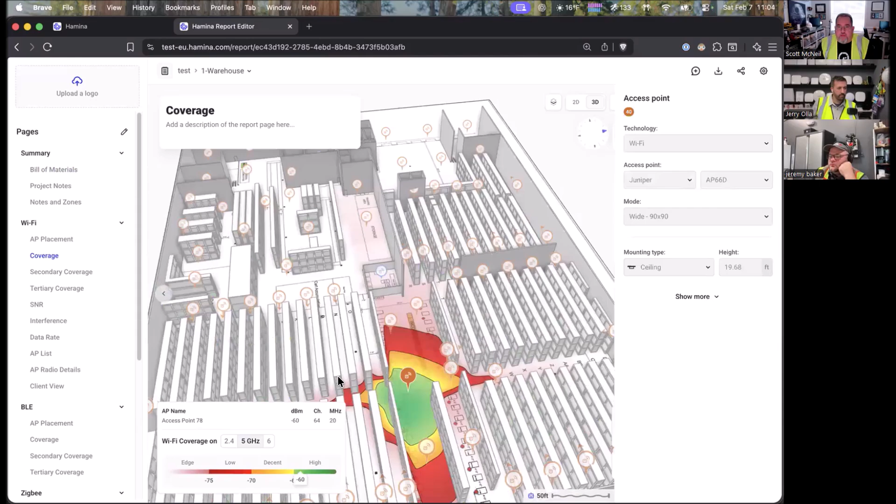And that has been a real game changer for my assessments and designs in general, because I'm able to say, okay, well, here's the links. You guys go look at this anytime you want. And it also lets you set a secure password to it, so it's not just open to the universe. Yep. And like I said, that's been a pretty big deal in that it's so important to be able to give our clients who are not as knowledgeable in this area, that's why they hired us, right? To be able to give them these visual things so that they can instantly understand.

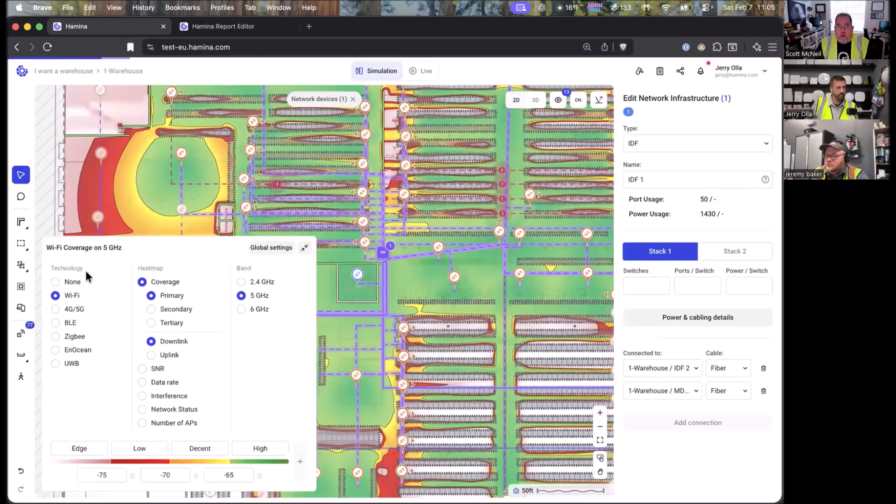My wife's a teacher. She talks about the different types of learning all the time. And visual spatial is a huge, huge thing, especially for primarily what we work with, engineers, right? You know, we all kind of have a different human brain set, otherwise we wouldn't be engineers. And that visual spatial is a huge deal, especially when you're trying to explain to those who don't fully understand the concepts that we work with every day. Yep. That's awesome, that's great feedback.

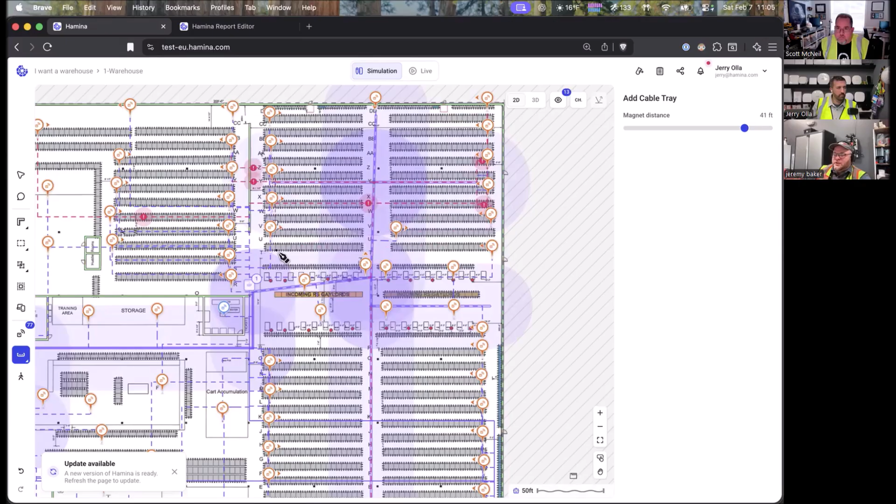I wonder, as we're kind of talking about this too, using this as that reference and pushing that, are there any plans for almost like an Excel sheet or something where people could add into it, or even add an external link? So if you had a shared project document, you could have status. Maybe not necessarily make this a full-on planner tool, but having something where either you could link out to an external document, or you could enter project notes as things complete.

So you have your subcontractor in there installing stuff, and they can say, hey, we've installed, check, check, check. These APs are installed. So a way for them to be able to kind of provide feedback or some kind of input or something to sign off on the design.

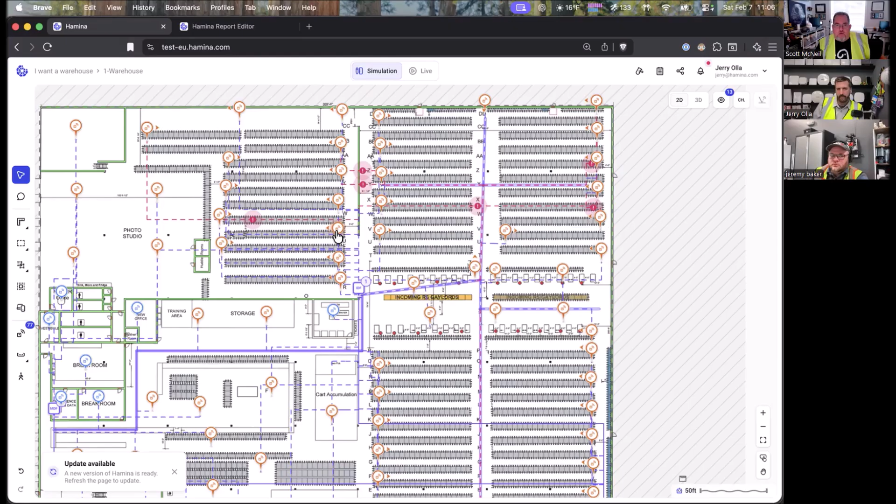Is that what you're conceivably envisioning? You could do external links, I mean, then that opens up a huge thing, be it Google Forms, be it secure SharePoint shares, so on and so forth. Hmm. Yeah, I would say the closest that we have to that today would be the ability to now add your own custom pages, and you can add as many as you want. So yeah, you could have some kind of a sign-off thing.

I almost wonder if there's a way to have something either embedded into this or link from this into something else. Yeah, that's an interesting thought. If it was like adding a radio, like Microsoft To Do or whatever, right? Where you could add a radio button task item with a check off, or somebody could leave you a note, or you could say, hey, Bob Dabalina is the responsible party for getting the cable ran. When is that complete? Things like that.

So then this kind of becomes for us a source of truth, where it's like, okay, we've handed this to the subcontractor. And it doesn't have to be super complicated, just a field where somebody could enter something in. And then I get a pop-up, almost like change tracking on a Word document or something. Then you see, hey, there's an action item on here. Look at it.

I like it. That might be useful. Yeah, I'd also love to see some examples of that too, if you have some other tools or forms or something set up for that. That sounds like it would be a great addition to these kinds of tools.

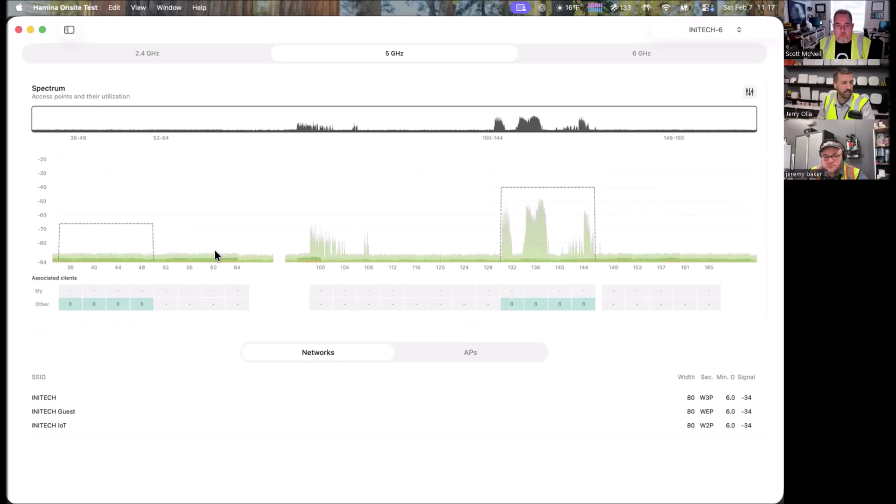So that's just using the Nomad with the NXT 2000, and it allows you to see things like that on the spectrum. And that gets captured as part of the survey. So we're looking at the real-time view there, but with Hamina Onsite and the survey solution, if you do a survey of a warehouse, you pick up all those kinds of things throughout the environment as well that you can then play back in the survey.